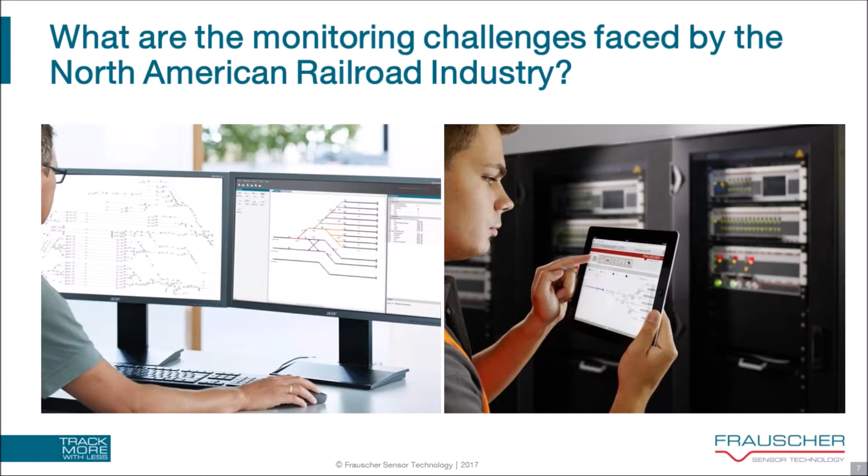Monitoring the North American railroad system, and this is the big challenge. 90% of the North American railroads are freight. They are categorized as Class 1, regional, short line, industrial railroad lines. Depending upon size, they are intermodal ports and facilities. As indicated, there are 140,000 track miles alone of the Class 1 railroads in North America. This includes yards, sidings, and parallel tracks.

To keep trains running safely and smoothly along this massive railroad network, consistent data and information is needed, such as for train tracking, asset condition monitoring along the right-of-way, and for rolling stock. In addition, there's also requirements for real-time monitoring of work crew safety and security along the track.

Over 30% of this vast network that has to be monitored is considered dark territory, which essentially means it is non-signaled. Although these areas have lower density of traffic, they still have monitoring requirements that are not currently being met.

To clarify, for those not from the railroad industry, asset condition monitoring refers to events such as detection of rail defects, wheel flats, and rockfall. Safety and security refers to issues such as vandalism, cable theft, trespassers, and work crew safety.

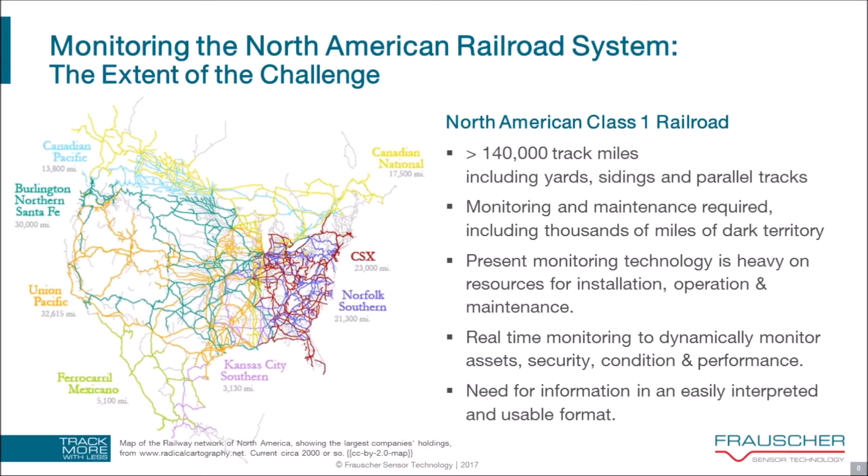In addition to freight lines, of vital importance is 100+ passenger rail transit operators in North America who face issues similar to those of the freight railroad operators. Over 5 billion passengers rode on North American railroads last year, and as urban areas continue to grow, this number will only increase. The safety and security issues in the US and worldwide have continued to grow and are a major concern to public and passenger safety. Keeping these passengers safe is a serious issue and high priority.

So let us talk about what is the present status of monitoring. The events that we have mentioned, asset condition monitoring, safety and security, train tracking, are still being monitored. They are, however, being monitored by periodic and discrete monitoring systems. Although FTS does not intend to replace existing detectors, it does aim to provide a solution to the data gaps that exist for continuous monitoring of multiple events, such as train tracking, asset condition monitoring, and safety and security.

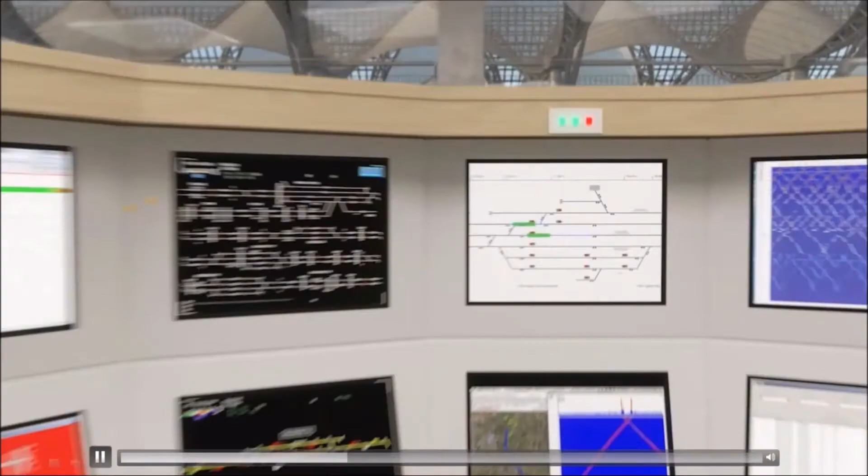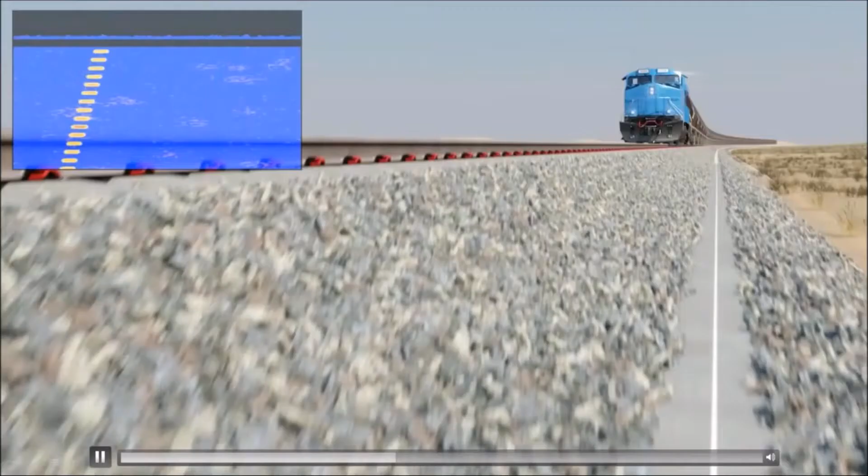FTS then provides an output that can be displayed to a dispatcher or a signaler, as we can see here. In this case, we see a station with classic axle counting systems in the station area and fiber detection along the block lines. When you click on the train, you get information about the train. However, if the system picks up something wrong on the train, it may display this and indicate it red immediately.

In this case, we see a flat wheel that is injecting extra vibration into the ground. A train can also have a rail break, and this break may be the source of extra vibration that can be picked up by the fiber and displayed to the signaler.

The same applies for security applications. If you are in a tunnel and people are walking across the fiber, this can be picked up and an alert can be given.

ETA, estimated time of arrival, is something that might be interesting for a lot of points along the railroad, and one of them might be a level crossing—to know exactly when the train is approaching the level crossing to optimize the closed times of grade crossings.

Animals: if there is no fencing, then animals are not really welcome on the railroad. Another part is worker crews. When we know where the train is, and when we can even pick up individuals walking close to the fiber, then there is a good opportunity to warn them in advance of the train.

So we have seen now a number of applications. Some of them are reality already, and some of them will be deployed in the next months and years.

Now, coming back a little bit to the sensor technology itself—Frauscher is a sensor technology company. Let's discuss and see how distributed acoustic sensing works.

Distributed acoustic sensing is a subcategory of fiber optic sensing. We have a small animation here showing the principle. We heard already that the fiber itself is the sensor, and within the fiber there are minuscule particles or impurities. When a laser pulse is injected into the fiber, these particles cause some backscatter.

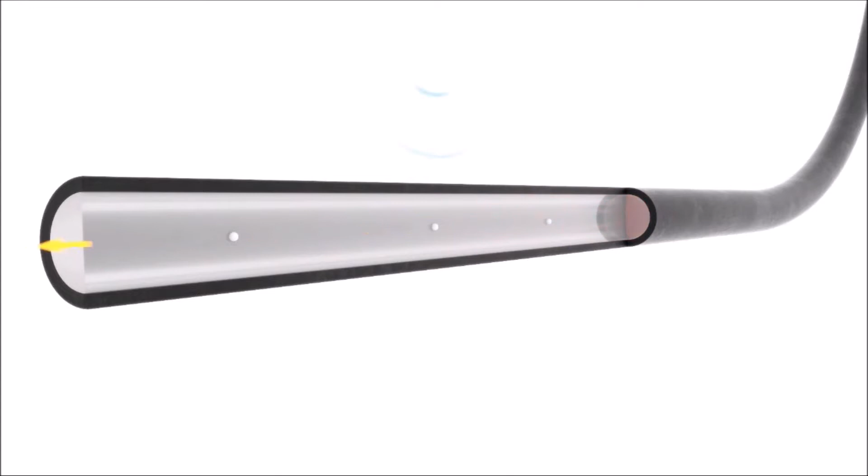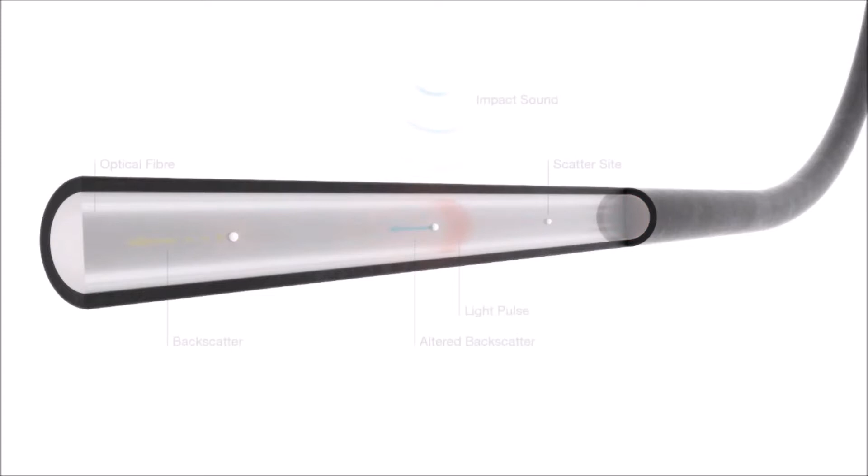If vibration attenuates the fiber, this backscatter changes, and this change in the backscatter is evaluated and can be allocated to a position along the fiber. This is how we can sense vibrations along the whole length of the fiber. So the fiber is the sensor—that's the big part.

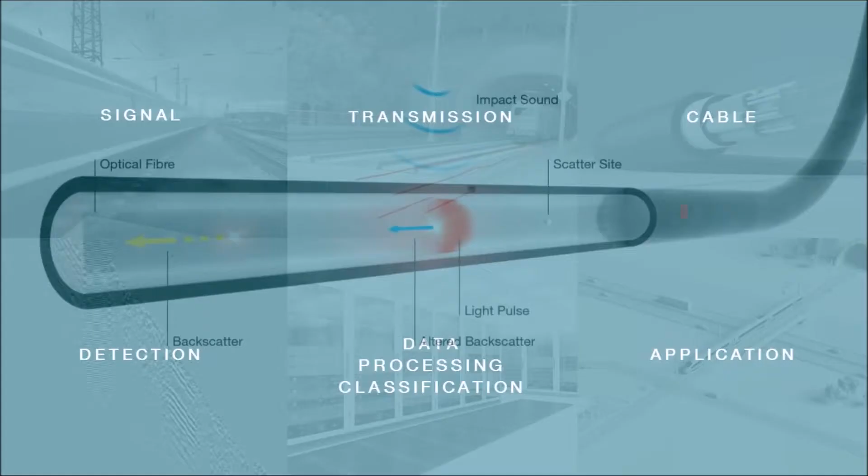Now we have identified 6 very important parts of all of this fiber optic sensing. First of all, it is important to have a signal that we want to detect. Then we need to have a transmission between the signal and the cable, because the cable is actually the sensor. Then if the sensor can detect that signal, it can be processed and applications can be derived.

Let's have a look at the signals. Signals for distributed acoustic sensing can be pretty much everything that generates noise, respectively vibration, so structure-borne noise. This can be a train, this can be a tram, this can be a metro, this can be a freight train, this can be a broken rail joint, this can be people on the track, but also this could be people that have no good intentions and try to steal cable in the cable trough. So everything that is generating vibrations is a potential source of signal.

Now we need to go to the transmission. So what is the distance between the signal and the fiber, which is the sensor? So the location of the fiber is really important.

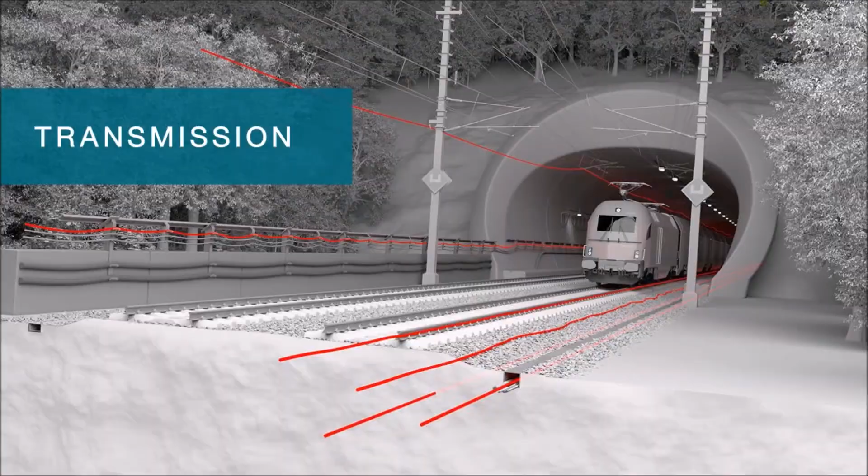And we have different installations. We can have the fiber buried in the ground, like here. We can have the fiber laying on top of the ground, in the ballast, for example. We can have the fiber attached to the rail. We can have it in a cable troughing, like on the bottom here. We can have it hanging on tunnel walls or on the masts of the catenary.

So the transmission, as you may see, is then different. It's either short distance or longer distance. This has a significant effect on how much signal arrives at the detector, which is the cable. And the cable itself has also an impact on the sensitivity. The cable consists of various layers, and every layer added may attenuate the signal.

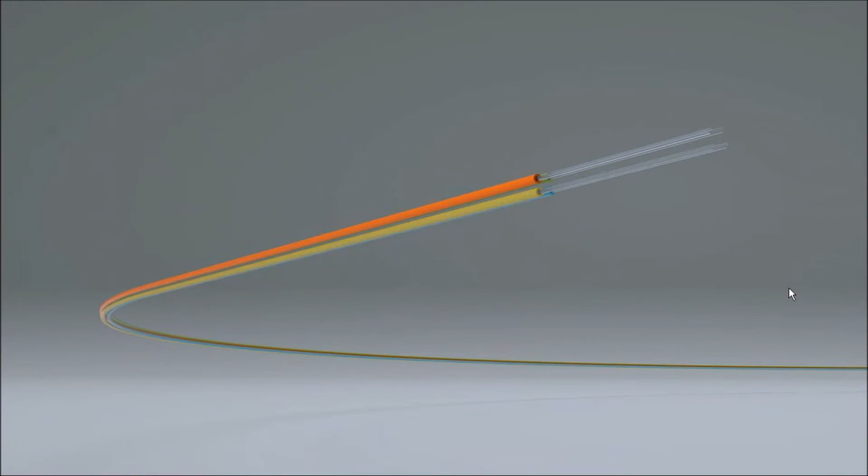And also the cable structure is of interest. And finally, the fiber itself, the optic fiber, the glass fiber itself, has also an impact on how sensitive it is. In general, one can say the closer the signal is to the sensor, which is the cable, the better the transmission is, as a rule of thumb. So basically, we should place the fiber where the signal is generated, or at least as close as possible.

So when the signal arrives at the fiber, we need to detect it. So the fiber needs to build these reflections and modify those light reflections. And then we can actually transfer this optic signal, this laser pulse signal, into an electrical signal, and this electrical signal can then be processed and analyzed.

At the moment, various systems generate for a 1,000-kilometer line something like 27 terabytes of data, some a little bit less, some a little bit more, depending on the vendor. This is an enormous amount of data, and this is now what we need to actually transfer into information. Because data itself is useless, we want to pick only the information out of data, and this real-time processing requires intelligent algorithms and real-time processing. And this is a huge workload, and only clever algorithms and clever processing strategies can do that.

Artificial intelligence is something that we have been looking into, and that is getting a more significant role in the future. Then, what applications are feasible? Some of them we will hear a little bit later are real already. Now let's see what kind of applications we have here.

Train tracking. Trains generate a lot of vibrations, so this is good to be sensed. This can then support information about ETA and level crossings, can be used for informing passengers at a platform or warn passengers when a train is passing through. And generally, all the train management could be optimized or could be supported.

Another field of application is asset condition monitoring. It is essential to detect various things that could threaten the safety of a railroad, which could be a rockfall. When you are in a canyon or close to mountains, rocks that drop onto the track can actually cause serious harm to the railroad. But also things like broken rails, wheel flats, or catenary flashovers might be detected.

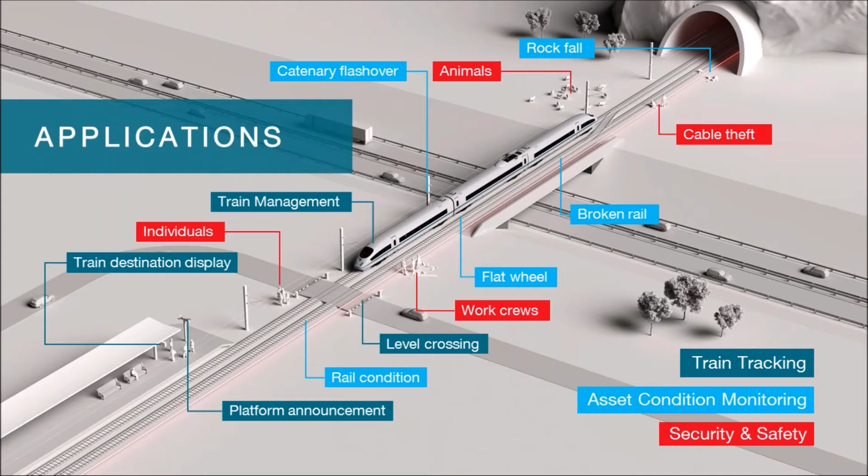And finally, security and safety. If there are individuals near or close to the track that are not supposed to be there, they might be detected, and warnings can be set off and measures can be taken. Worker crews that are supposed to be there and working might be detected and warned of trains approaching the site where the work crew works. And finally, vandalism and terrorism is an important topic nowadays, and detecting those individuals might be of interest as well.

a fiber of a maximum length of 40 kilometers in each direction, which is around 25 miles in each direction. This fiber needs to be connected to an optics unit to transfer the light, to inject the light into the fiber and transfer the reflected light into electrical and data signals or digital signals that can then be processed and classified, where we then make information out of the data.

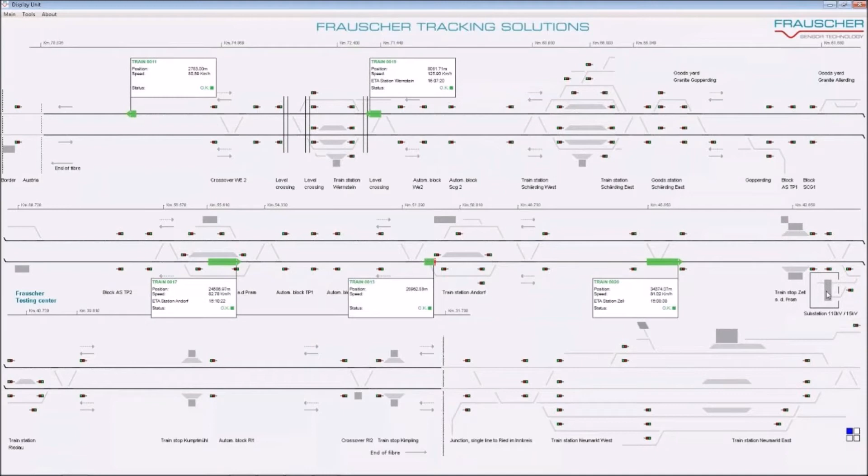So when you click on top onto the individual trains, you get the information on where the trains are and what is the estimated time to arrive at the next station. And this is all automatically calculated and displayed. If you click again on the trains, this pop-up window would disappear and make a clearer surface.

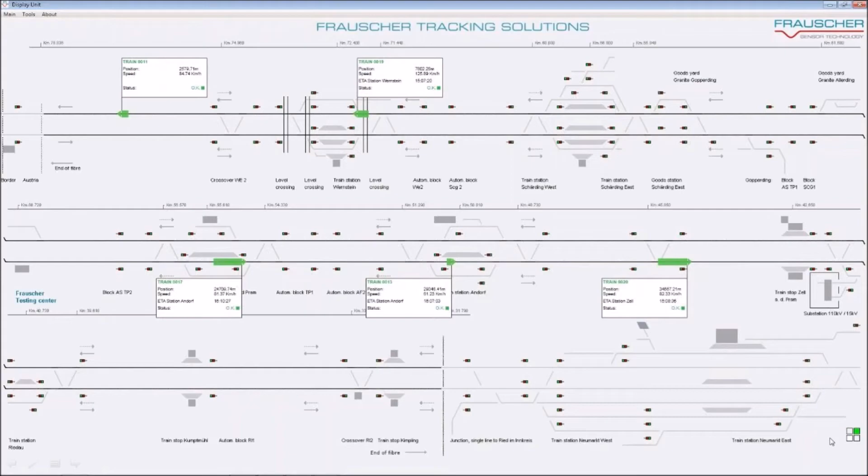We have heard about the applications already. We categorize them into train tracking, asset condition monitoring, security and safety. And I would like to pick a few of them and go into details.

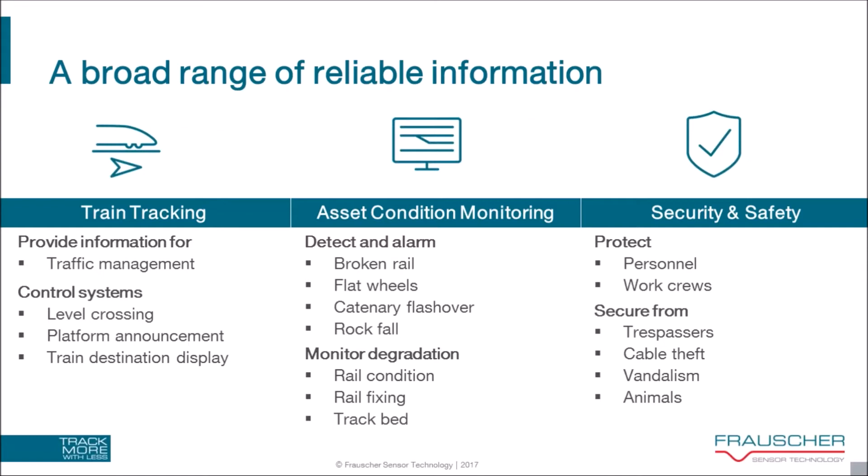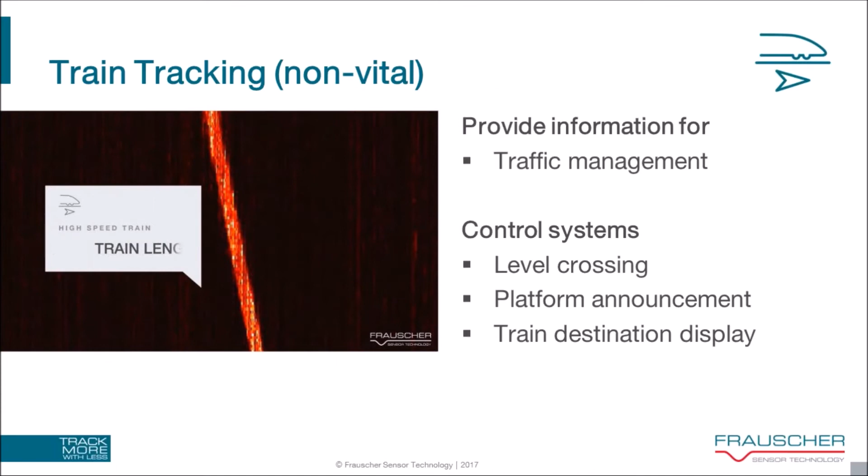The first one is train tracking. This is a video done by a drone overlaid with the analog signal or the process data, where we can derive the position, speed, direction, length of train, and the estimated time of arrival at the next point of interest. This can be used to optimize traffic management, to make train movements more efficient, to reduce fuel consumption,

to eventually warn on level crossings and announce on platforms or display when the train is going to approach.

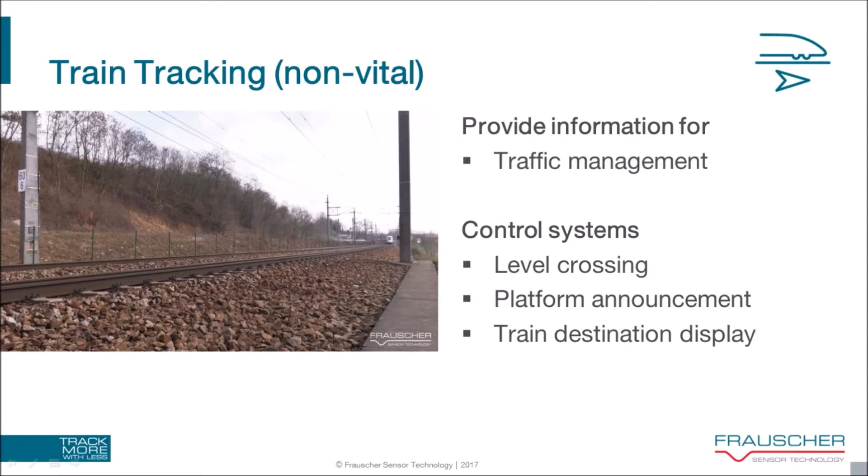The next example we want to discuss is asset condition monitoring. You can see a video done at Austrian Federal Railways where flashovers have been simulated. Flashovers between the catenary and masts can destroy the catenary on electrified lines, which has a significant impact, because if the catenary breaks, no train can go forward or backward anymore, and this would have a huge impact on operations.

However, we want to start with the first one and go into a bit more detail on broken rails, which is a significant topic. As we have seen in the video, trains may be the source of a rail breaking, and a broken rail may be the source of a derailment. So it would be really good if a train breaks a rail to detect that.

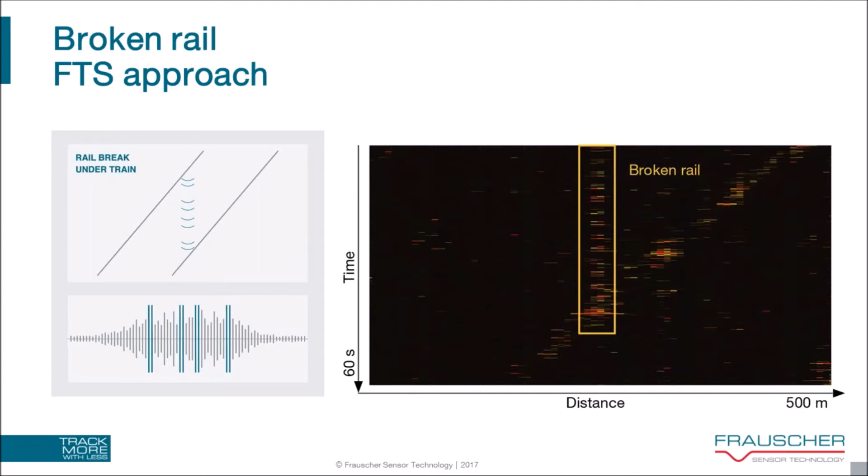And we saw it on the video, and this is also what we have been working on, and this is also a reality already in its basic status. So we are able, to some extent, to locate those broken rails within a range of 30 to 40 meters, and this might prevent the next trains from derailment. And all of this is without any extra equipment close by the track—it's just the fiber that might be in place already.

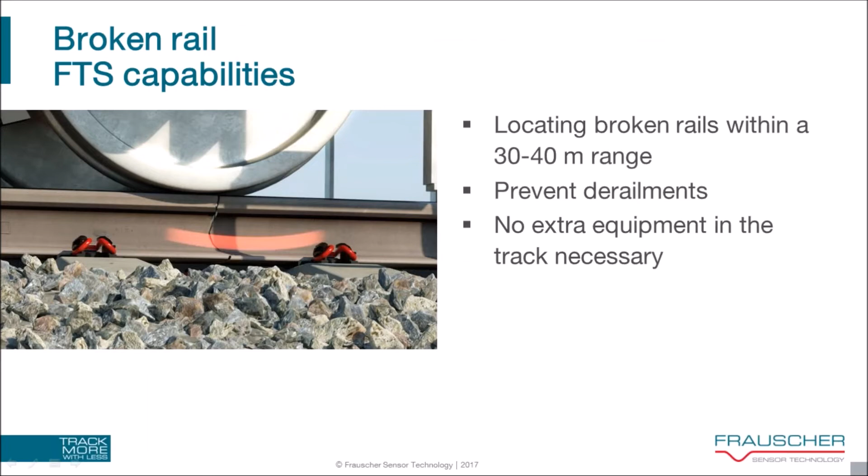Another very successful opportunity is rockfall. So when rock falls off the mountains and blocks the right of way for the railroads, this is something that has to be taken care of.

And this is how the signal would look like, and this is how it is displayed to the dispatcher. The dispatcher can then timely and precisely warn the train driver to stop before the train is actually hitting the rocks on the track.

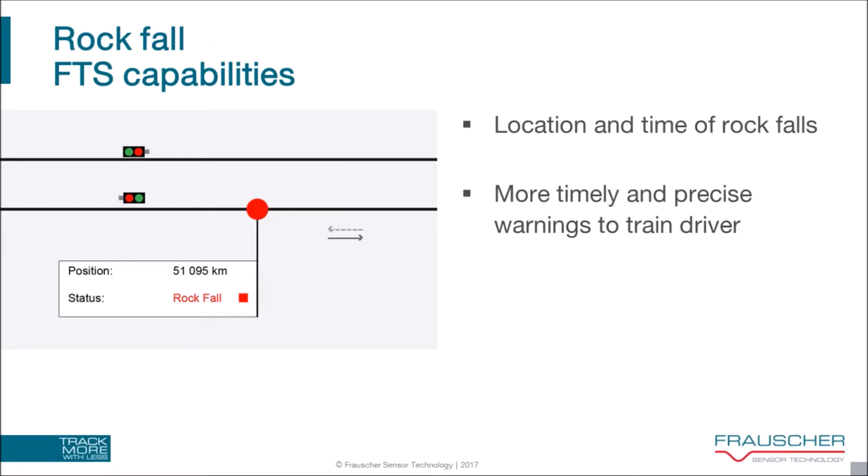Another point we had is security and safety. So if people are walking along the fiber, this can be picked up. This might be personnel or work crews that should be detected so they can be warned of trains approaching their area. But this could also be trespassers or theft, cable thieves, or people with vandalism in mind, or it could be animals.

The main part again is this: the fiber is the sensor, and the source of signal needs to be close to the sensor to pick it up and classify it. These were a few applications that we already have in place, and now I would like to give a brief outlook of what could be achieved in the future.

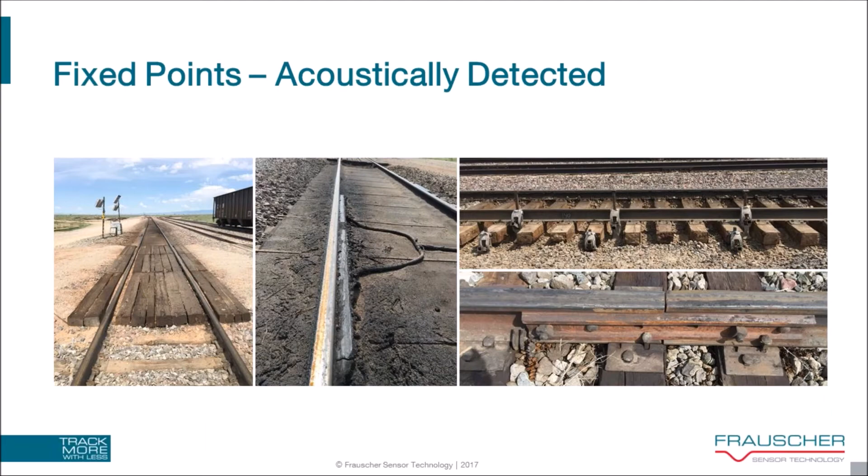Asset condition monitoring was and is a very important topic. Right now we're in the situation that when something happens, we might detect it, classify it, and report it to the railroaders. But wouldn't it be interesting to detect if there's any change in the track, not only reporting when something has already broken, but getting information when something is deteriorating—when rails are shelling, when rails are wearing, when tie plates are breaking, or when sleepers or the ballast are not in good shape anymore, when there are hollows below the ties.

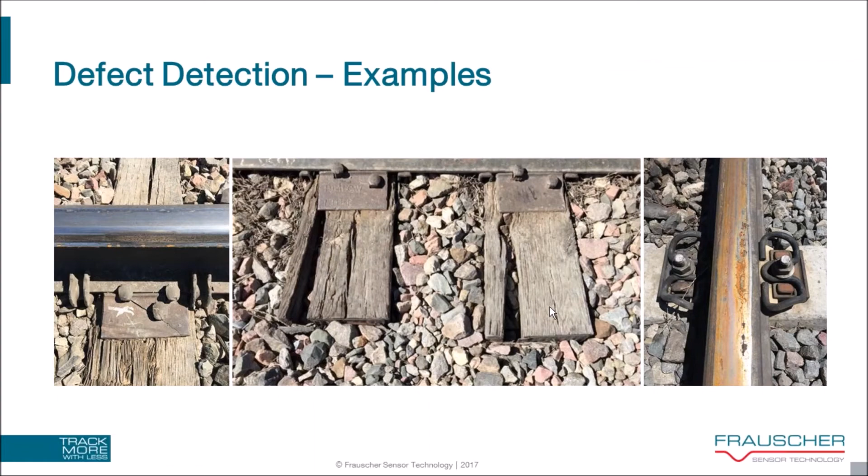Wouldn't it be really nice to predict when something is going to happen, and therefore prevent it from breaking, doing maintenance before it actually breaks—but as close to the breaking point as possible to optimize resources spent. At the moment we are at the detection level, so we can detect a lot of things, and we're working on classification and output mechanisms to optimize asset condition monitoring.

And that's the end of our presentation, and we now have time to answer questions.

Thank you very much, Martin and Vivek. That's been very informative. We already have a couple of questions, and I wondered if you could first describe a little bit about the operational conditions for installing equipment in monitoring rooms. Are there particular characteristics they need to have?

Yes, indeed. The optics unit comprises quite sensitive laser technology, which is sensitive to temperature. Depending on the technology and components used, the usual operating temperature range is from around 0 degrees centigrade to 40-45 degrees centigrade. So a regular building is usually fine. If it's an outdoor shelter, it should be double-walled to make sure the temperature doesn't increase, or air conditioning is necessary to keep it within that level.